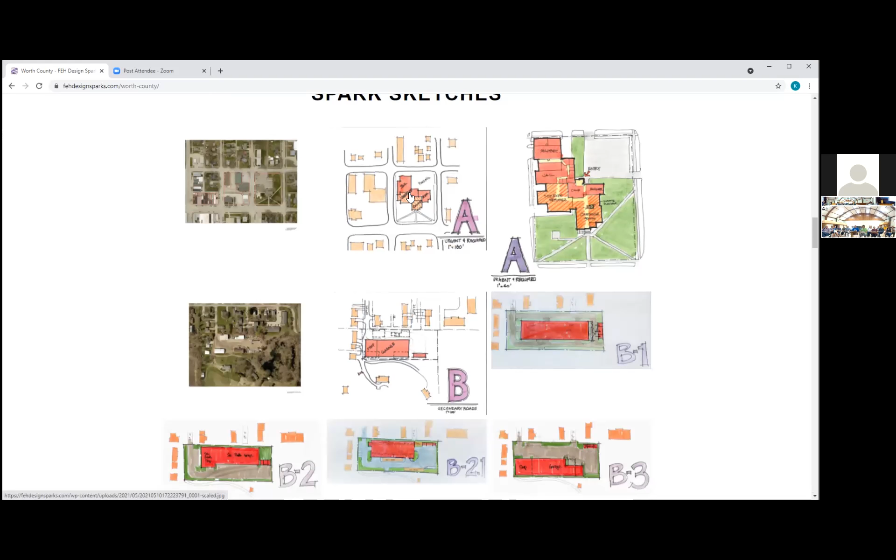Okay, for some of you who weren't able to participate in the Spark Work session the day before, ATF meeting number 3 and number 4, we will go through these and kind of explain where they're at. So we asked you as a group, what do you want us to study? And we made a long list of things you wanted us to study, about 9 things. Well, during those meetings, more and more things we were asked to study. So we started at a very small scale.

You can see 1 inch equals 100. These are just very diagrammatic sketches. This happens to be the first one, A, and the idea was, well, only do what's required and what's urgent on your assessment list. The buildings that are in orange are existing buildings. So this is the existing 3-level courthouse and the 1-level sheriff and jail space. We got red lines through it because that means we need to renovate it because there's so much work inside that is not compliant with the law or the code or the state requirements. Space needs is a big part of that, and this concept would show how big we'd have to expand the jail, for example.

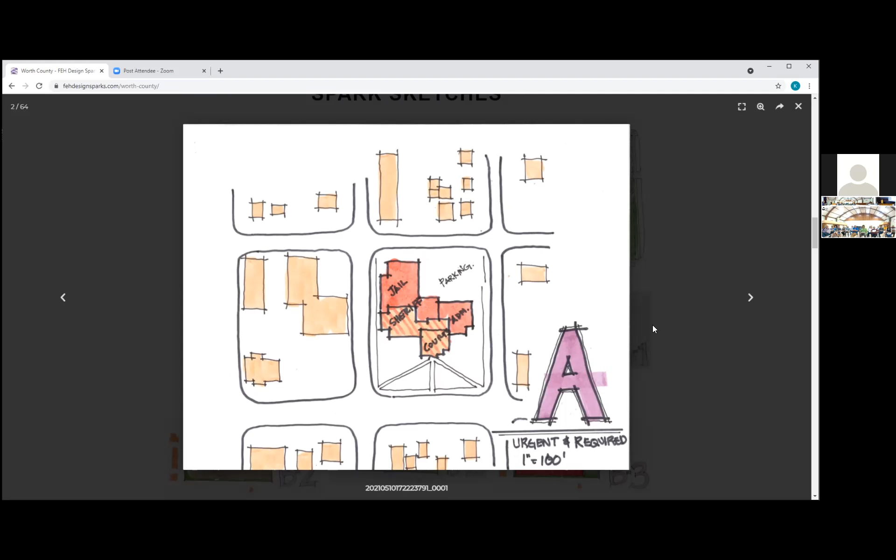So when we looked at it at a little bit larger scale, 1 inch equals 40, you get a better sense of, okay, how much square footage do we need? The yellow that you see, that's just really circulation corridors. The red boxes, that's all new construction. So this shows what is required on the sheriff and jail side to both meet the state requirements for space and to bring the deputy spaces back out of the storefront building that's a block and a half away and back into this building for better efficiency of staff. And the courthouse space, and a space for the engineer and maintenance. So as you can see, what's required and urgent only is still a pretty large expansion if it's going to be all at that space.

So this was done as a strategy to show you what's probably the most cost-effective strategy: to renovate the existing building and expand it. So that's option A.

Excuse me, as you go through, can you tell us what the expense is for these options? Like option A? The question was, as we go through, can we talk about the expense? So did everybody pick up a sheet like this? If everybody picked up this sheet, there's a lot of options here. You asked us to study a lot of things. So what we tried to do is simplify that for you into categories. So you see courthouse, administrative, and courts. So that means there's not a jail or sheriff there. It's the administrative departments and the courts. It's option G, J, and O.

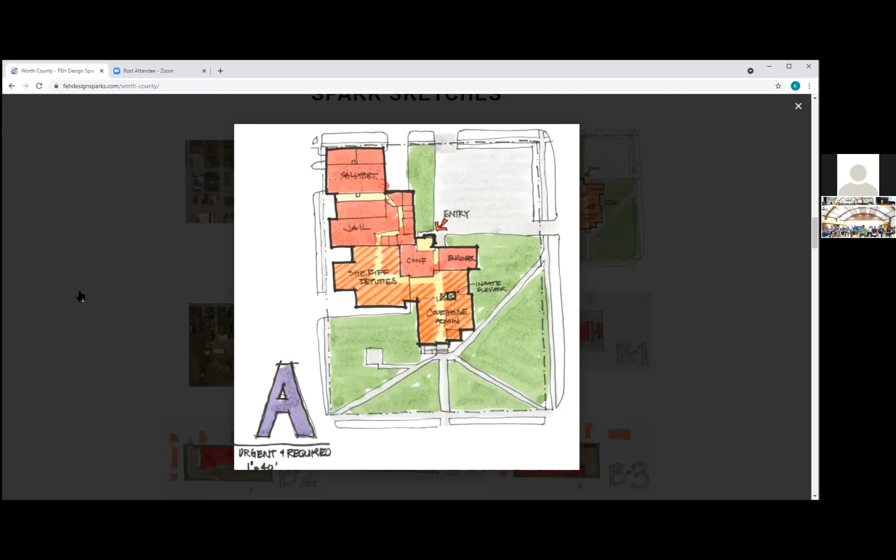Okay, so these are realistic budgets with healthy contingencies built in as well.

So Hey, Kevin, could I weigh in on that? Go right ahead. So the Beacon site is a representation of the legal, it is not the legal. Correct, it says that on the Beacon page. Yep, and then I have been to the assessor's office and they haven't done updates in years.

That I'm aware of, as alleys have been vacated and bought up by people that haven't changed it, and that's up to that office to do. And then I draw the representation of that on the Beacon site. So just to let everybody know, when you do something like that, we don't go by the lines on Beacon or anything like that—it's just a representation of the legal, it's not the legal itself.

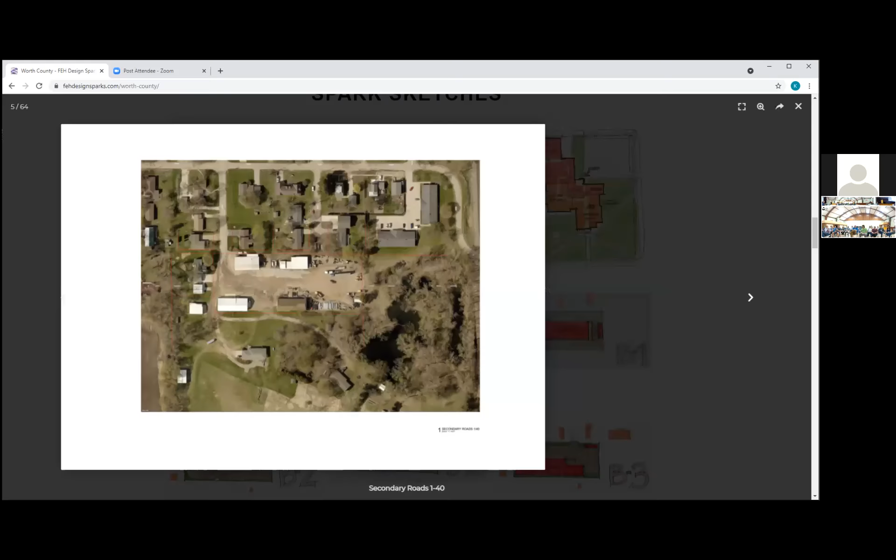Well, what got us was the pictures that Tom put further out. Yep, we're gonna be looking at those, and again, these are very diagrammatic. This is basically showing a sense of scale, replacing all those buildings that are all very, very old, with a structure to house all the things that you want this picture to house.

Alone it cuts off 13th Street. Yeah, yes it does—there's homes in behind there. And anything that is done on any of these sites certainly would not be done using Beacon as a base. There would be a site survey that identifies property boundaries, utilities, topography, easements, and so forth, before anything would go any further than this.

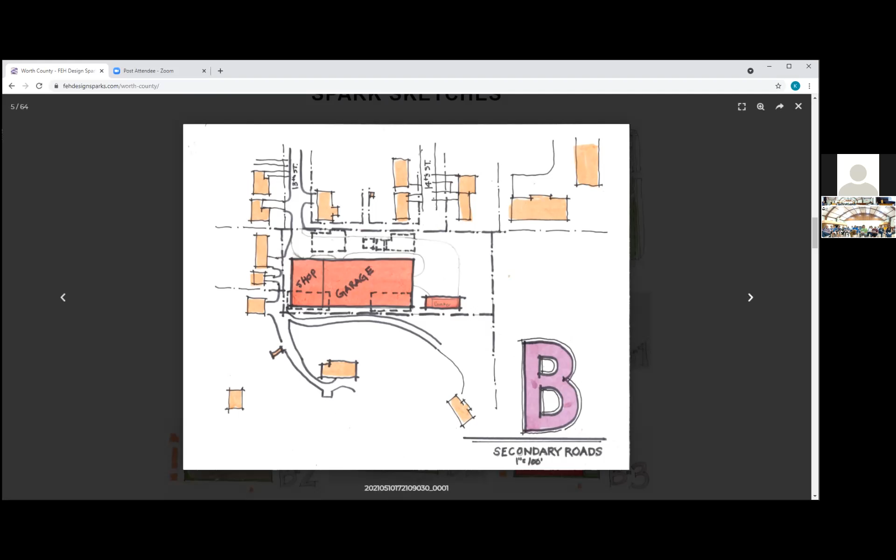And costs for those surveys and subsurface investigation is built into the budgets for every one of these. So this was a diagram for B at that high scale.

And we looked at lots of different scenarios for what that might look like. There's a lot of different ones, and when you look at this, you'll see, boy, they didn't do a cost for B.

We did not do a cost, but based on what is shown here, that's about a $6 million total project budget. And when we had, I think it was meeting number 2 or so, somebody asked, well, what's the cost of that? And we said that square footage might translate to about $2 million. It is way more than that.

And you can see the size of this structure. If it were to be built at this size, which it may or may not be, and it may be done in pieces, that's what you're looking at for this kind of cost. And that price was developed for looking at this facility here on the site we're on, over there.

I have another question. Yeah. What type of building is it? Is it a metal building? Is it a concrete building? What are we looking at for this building? It was laid out as a...

Precast concrete slab building with the expectation that it would last 100 years. So it's precast concrete slab, insulated sandwich panels that are fabricated in Iowa, with basically a gable metal roof on it. That's what was priced here.

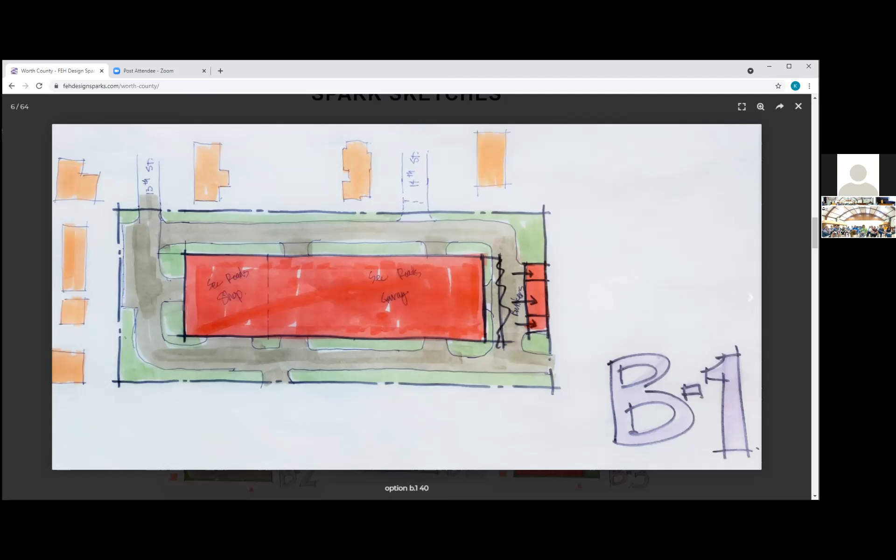This could have lots of different types of roofs. We've built many structures like this. What we put in this budget was a low-sloped gable roof with metal roof panels, just a long linear design—there's an image of it in here too. But it could have been a flat, low-slope roof with a membrane. Could be a lot of different things. Could be an arched roof with different materials. But we tried to use kind of a baseline for this structure.

So these are a lot of different layouts. This happens to show more of what the inside might look like, where all the different vehicles and pieces of equipment would be stored, the smaller staff areas, restrooms, the sign shop—the salt, sand, and mixed bunkers are outside. There's some yard storage outside, a wash bay, but basically all the individual pieces of equipment. And if we can keep most of that inside, you're going to get a lot longer use out of your equipment, your investments in equipment. You may not need to replace them as often.

I'm just curious—when you look at this particular picture, it shows that, again, it took away 13th Street and the continuation of our street. So are you going to go back and redo this, because it's hard to even consider any of these options when each one of them either infringes on our alley that we own, or totally cuts off 13th Street, and now Linda and Arnold Griffith can't even get into the driveway. This picture shows that Arnold and Linda Griffith can't get in and out of their house, garage, or shed.

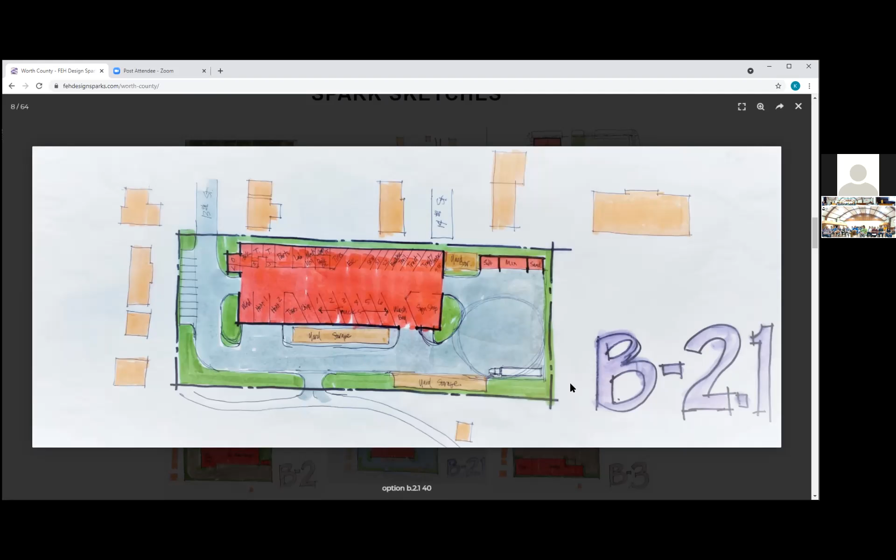The homes and developments on the north end of town can't grow because they can't hook into the sewer system.

So the next thing we were asked to look at was county conservation. County conservation right now inhabits two small buildings that are basically filling that little lot. It's not ADA compliant, and it has to be. The entrance, the restroom, it doesn't have any of the things it needs. Plus it's short on space. If you've been in there, you'll know.

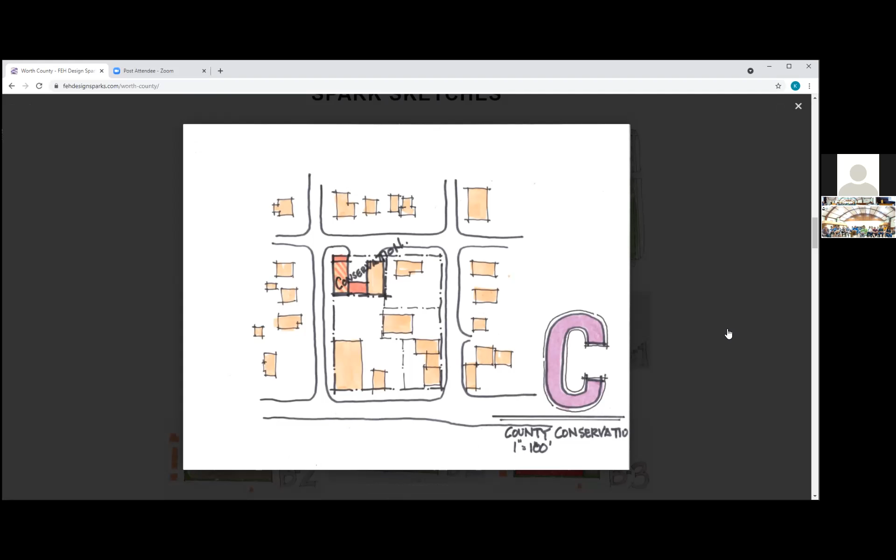So we tried to look at what it would take to add some space and make the building handicap accessible. That's what this diagram represents. We did not price this out because honestly, we don't think this is a feasible solution, and nobody who participated in any of the meetings ever voted for this or said they'd like to study it further.

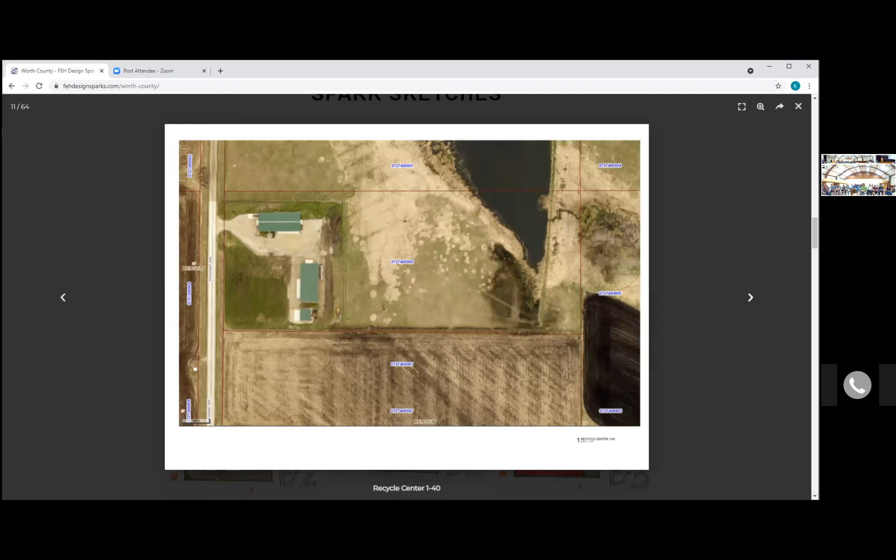Here's that recycling site that some of you are in love with as opportunities for where buildings might go. The thing I think is important to recognize is that the county doesn't control this whole site. The state actually controls this whole section, so the county only has control of this piece. But of course, as designers responding to other folks' ideas, that never stops us. So we showed some drawings of structures that might sit on the state-directed piece.

Option D, this is county conservation D, with a new building to replace the structures that you have. You'd probably sell off that piece to somebody else in town, so that's D. And we did price this out—D and D1—that's about $2.1 million, as you see on the sheet. And of course, this is a diagram.

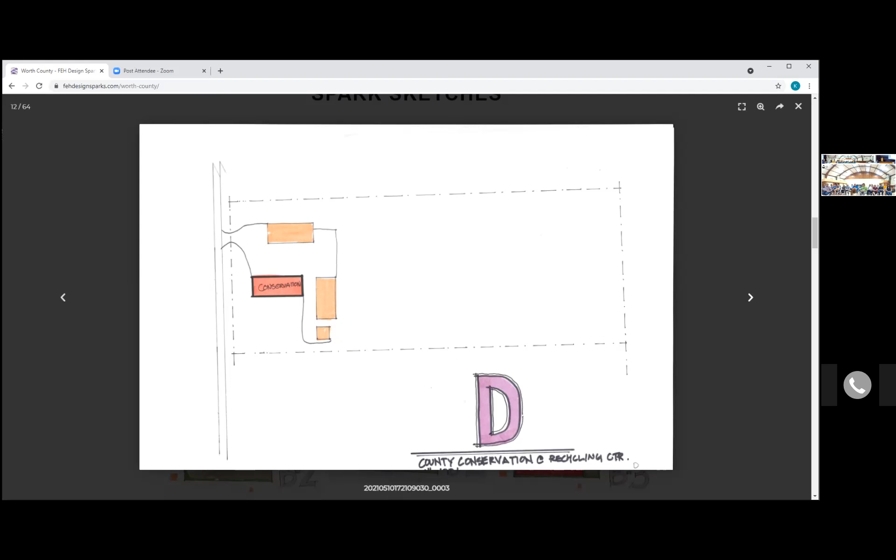My name's Corey Blue, I'm the current mayor. Seven years ago, I believe, county conservation came to all the city councils presenting that they wanted to build a structure out at the recycle center, and I believe the project was only $1 million at that time. It was put to vote by the county, and nobody wanted the property taxes to go up, so it failed. And it was a cheap project. So people do not think future.

Yeah, just wanted to point that out. Yep.

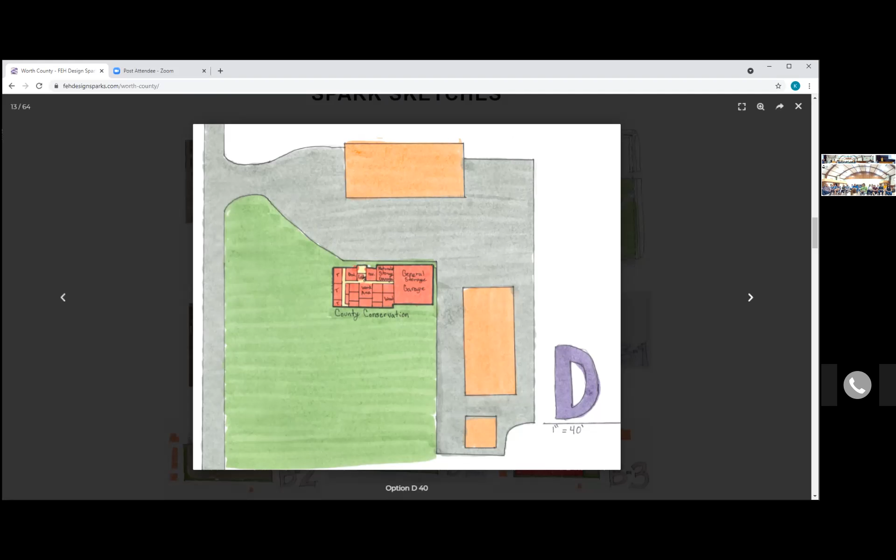So this is that same option with a little more detail drawn. What is the type of building?

The question was, what building type did you look at for this? This one is priced as a 6-inch metal stud with insulation and continuous insulation to meet the energy codes, with a sloped asphalt roof. It's not a large building in scale—certainly not as large as the one we were just looking at, or the courthouse, or any of those other departments. So this is a fairly standard, basic building.

With a brick veneer on the outside. I understand that conservation already has a building out there—can that be made use of? Conservation has a shed out here, I believe it's this structure here.

We have a conservation—yeah, there he is. It's being used right now. That's where all of the equipment is stored. Well, I mean, can it be used—that kind of, we were talking about putting that equipment into this new building that you were putting up.

The new building is not really replacing this one—it's replacing the two, it's replacing what's in town. But when you talk about using that with the road construction, the road maintenance people, we did have another option. Somebody asked, what if we move county conservation in with the roads structure? So we do have another option that looks at that.

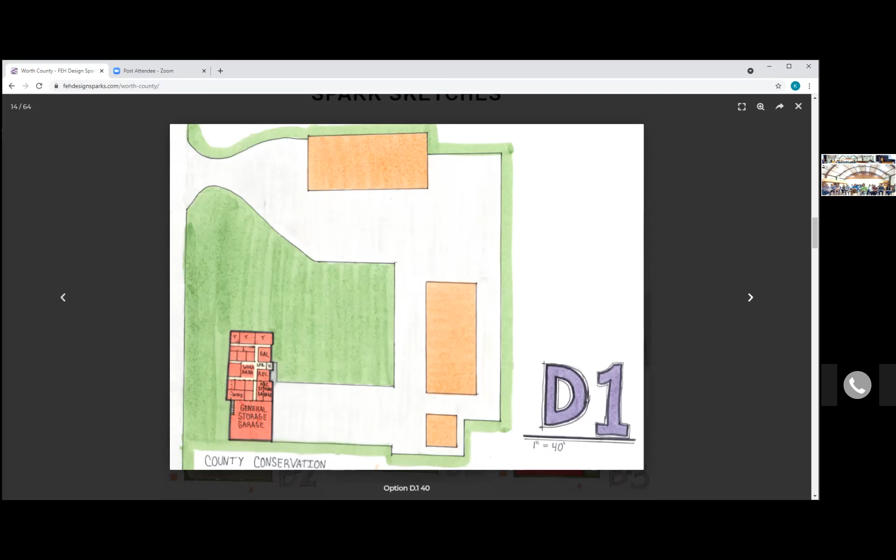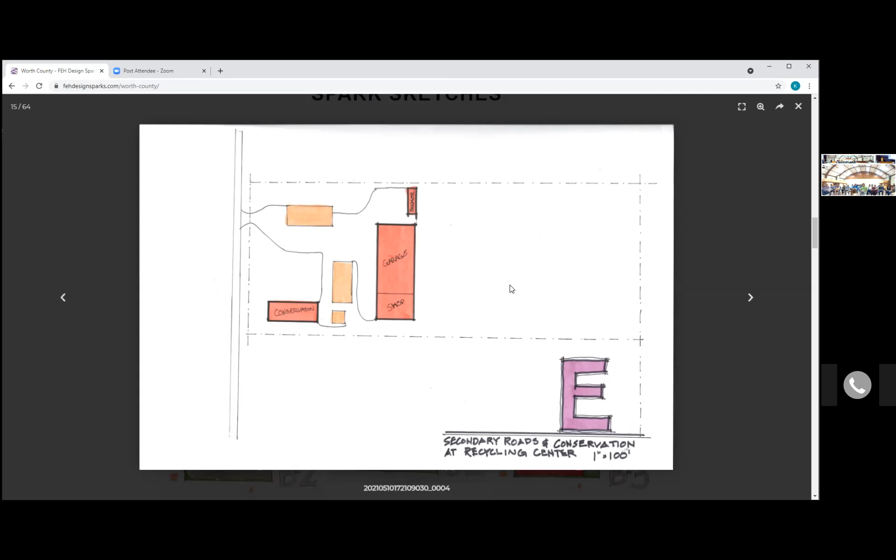And as I said, this one looked at actually moving county roads over here as well on this site. Where the footprint of county roads is, it is on the state property, not the county property. Does that mean you can't get it? Maybe, maybe not, it's a possibility. But that was another concept somebody asked us to look at.

So this is another site diagram of that same thing. Here are those three existing structures.

There is a septic field out here on the east side of the recycling building. So obviously there would be one for the conservation building as well and secondary roads, because we're not connected to a sewer out there.

But this is the size of that secondary road structure, what it might look like on the site. This is the fence. That's the fence, in case I missed it earlier.

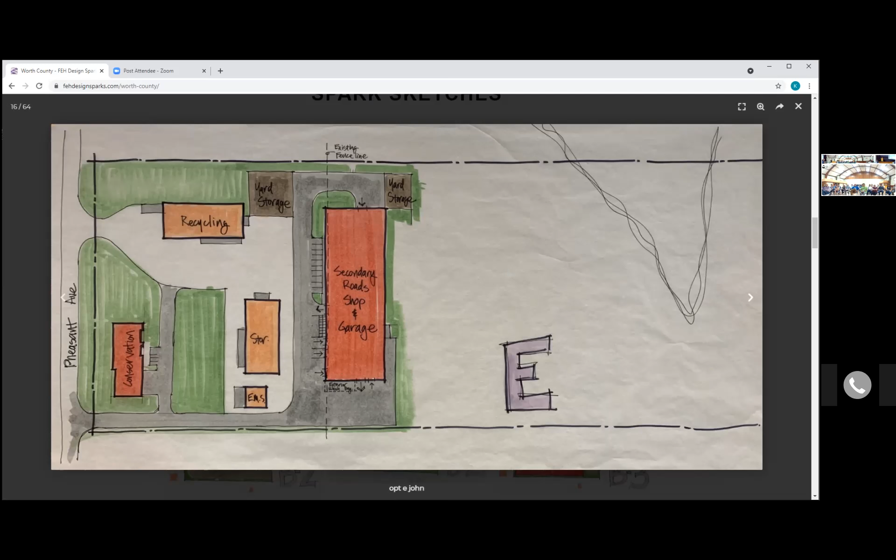So this is basically a larger scale layout of what's inside that structure. As you can see, there are a few overhead doors coming in, but primarily it's a drive-through facility. So you pull your vehicles in and then you can drive out on the other end, or come out through this right here or a wash bay here. And these are the maintenance hoist and parts rooms, and so on.

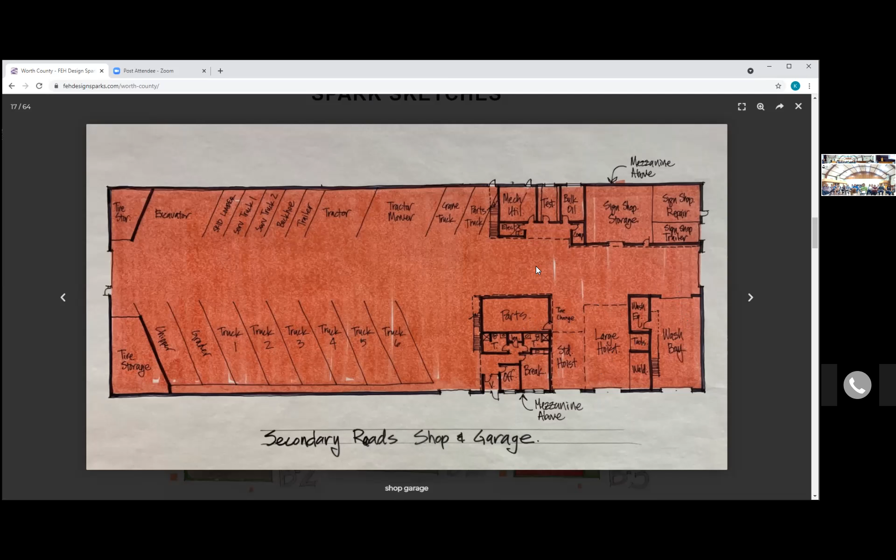There's what it might look like on the outside. This was just the idea that kind of went along with that big structure, with that sloped roof, precast concrete walls.

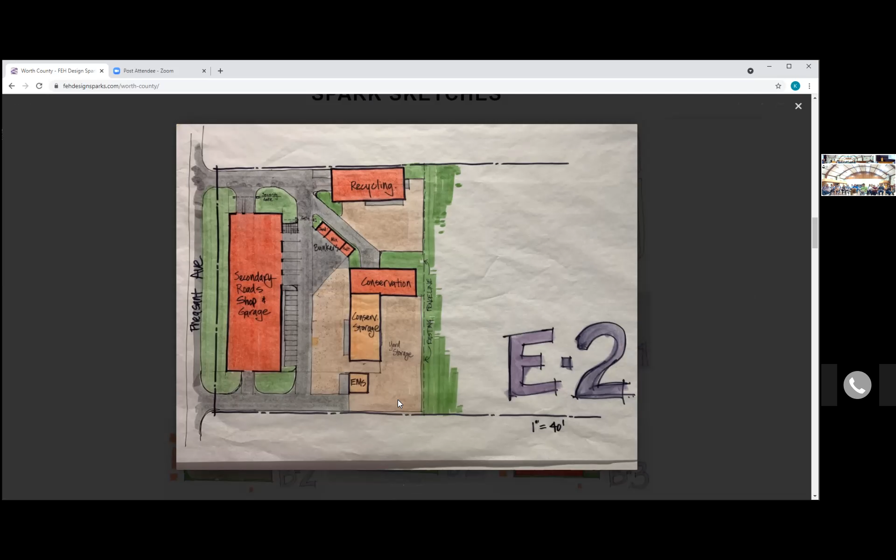Same drawing, basically, slightly different configuration. This one came as kind of a culmination from a lot of comments. Can we get it all on the county's property? And we said, boy, if you moved the recycling building, which is a pole barn, if you basically cut it off at the ground, formed a new foundation and moved it onto that foundation, and actually built the county conservation structure over here so it's connected to the other county conservation storage building, you could get secondary roads in here with plenty of turning radius for the large trucks and vehicles and all the parking that you need and not have to cross the line. So this was created at the end of the 2 days, and I think a lot of people really liked this option. E2 got about 15 points worth of voting. So it was one that people really liked, or preferred, I would say, at least the participants.

So this is another kind of layout drawing of what that might look like inside, the big one.

Okay, I have a question. So you're looking at spending $2 million more to put the big building on the west, move the recycling center, because it's harder than talking to the state of Iowa and trying to procure a few extra feet of ground. I mean, ground at $10,000 an acre, whatever. Would anyone from the county like to speak to that? Because actually it's going to be a very long and expensive process, is what we've been told. Well, that's what I'm asking.

Yeah, anybody in the county want to talk to that? Jim? What it is, the state actually owns the property. It was purchased with state and federal funds, and that has to be paid back at current market value. Okay, and then besides being paid back at the current market value to expand the existing site, then you have to fill in a potential wetland to do so. And that's a federal problem. No, we probably can't fill in the wetland is what I'm saying.

Yeah, well, I mean, that's what we need to know. Right, because it might be cheaper to spend the $2 million more is what you're saying. Right, because you've been to the site and you know how, once you go through the recycling center, how it goes straight down into the pond. Yep, and that's what essentially you'd just be encroaching on that pond. So it may be regulation that would keep us from doing it, not cost at all. Okay, well, but that is a question I have. Yep, okay, so.

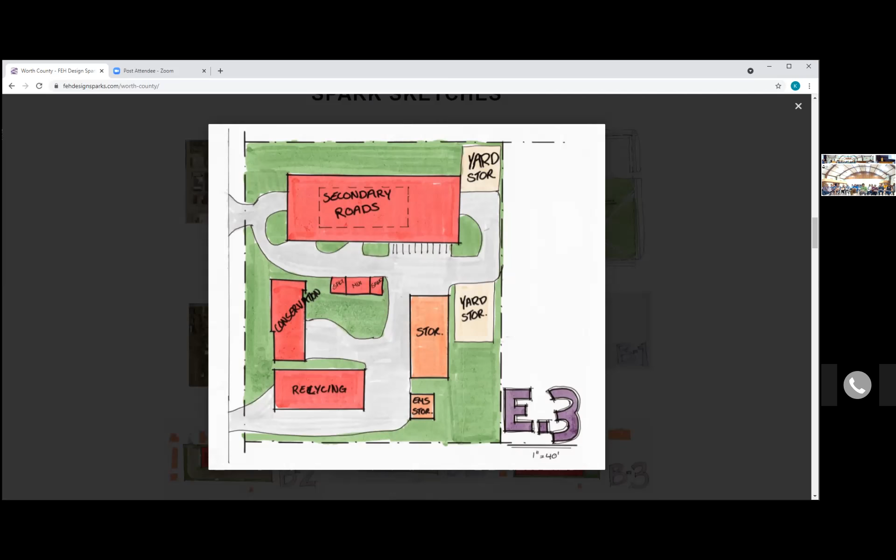F was that idea, what if conservation was also moved on the same site with the shop and the garage? What if that building was divided up so the roads shop was combined with conservation so there could be some efficiency in space, so you wouldn't have to double up on some spaces like restrooms, a conference room, or storage space?

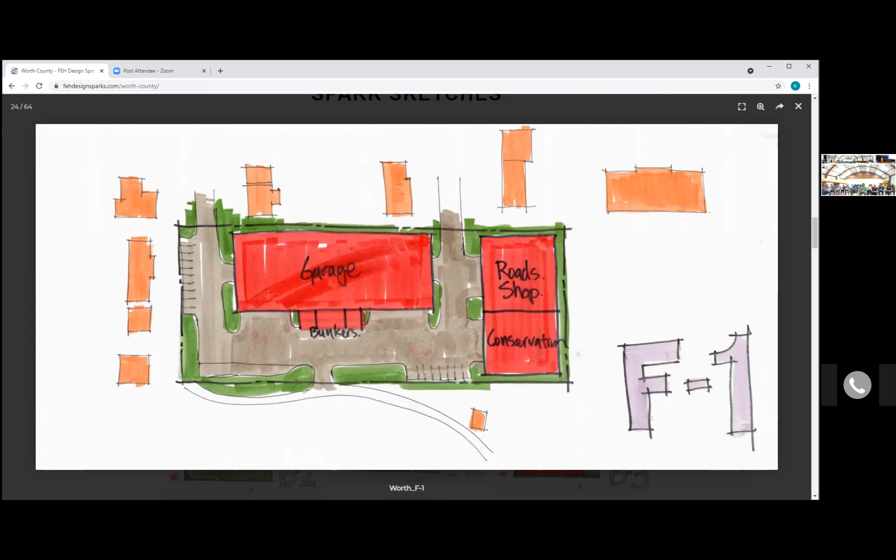Option G then was basically, let's renovate the courthouse. This is a concept that says let's renovate the courthouse, and as you see on this sheet, without having the jail and sheriff there. Jail and sheriff move somewhere else, and this is just the judicial space and all the departments, and bringing the treasurer out of the building they're on Main Street, so there's more efficiency into this building. You can also see that the maintenance garage and the engineering office stays right where it's at in this concept. That saves some dollars as well, obviously.

This red box is the footprint of square footage that you would need to add, and you'd have to renovate the existing jail and sheriff's department to give you the square footage that you need. And of course, you've got a lower level and an upper level on the historic courthouse section. And you get a sense of how that fills up the site as well.

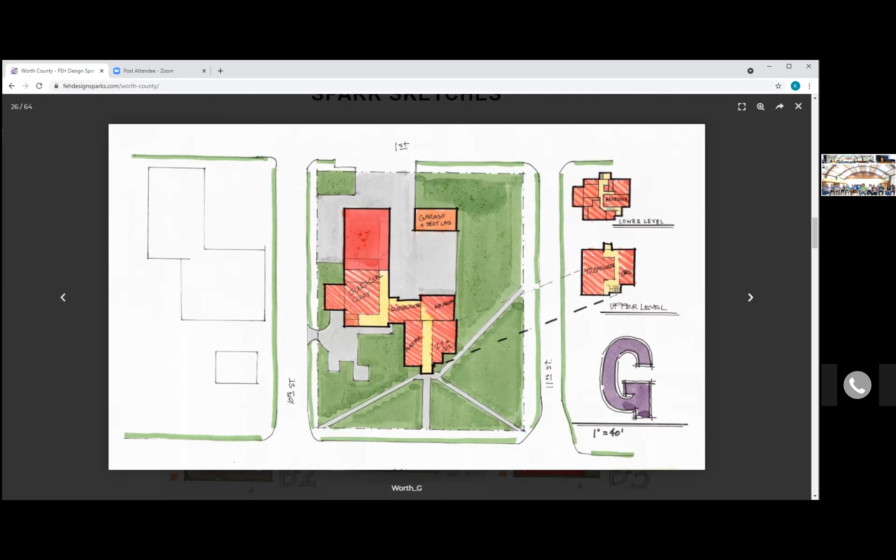H is, the idea is, what if we built a new sheriff and jail on the site as a new structure? Once that's complete, we move the deputies out of their building and the sheriff and jail into this new structure, and then we're able to renovate the existing sheriff and jail space and let the other courthouse departments expand into that. That's the idea that's represented in this diagram.

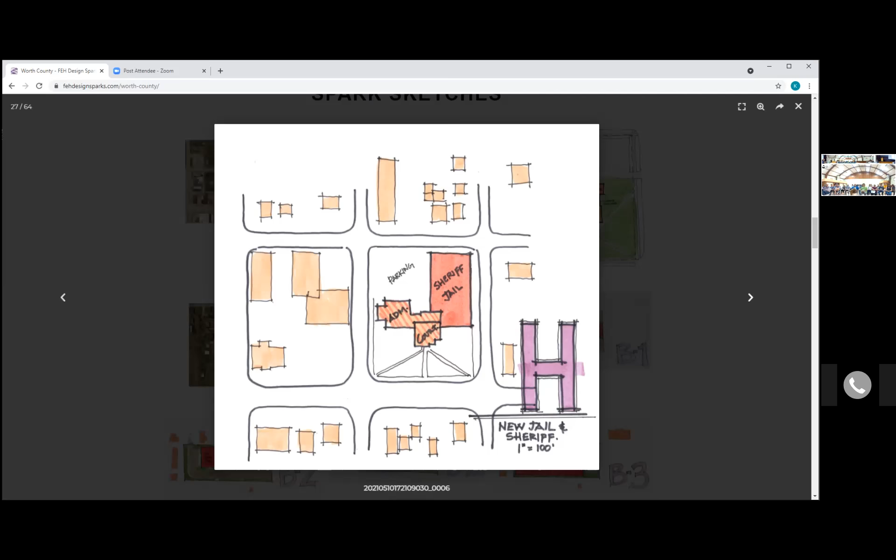What we found is there's still not enough square footage to be able to do that. We would need this much more square footage to meet all those requirements. This is the jail side and the sheriff's side up here. The historic courthouse structure is right here, and this orange is the jail and sheriff structure. This was a test fit of how we would fit the spaces into the building and into the upper level to create more of a kind of a public, more of a lobby space here.

Some of the concerns we heard about this was it doesn't meet the goal for success that was identified to provide separation of courts and jail from the public and other services. Because if you're bringing a defendant from the jail to the courts, you're bringing them right through the public lobby. Or you're putting them in a squad car and driving it around the block and bringing them into a sally port over on this side into the back side of the courts, which you can do, and it's been done in many places. So that is how that H fits, and you can see where H kind of lands on this chart as well. It's just under 14 million on a total project budget.

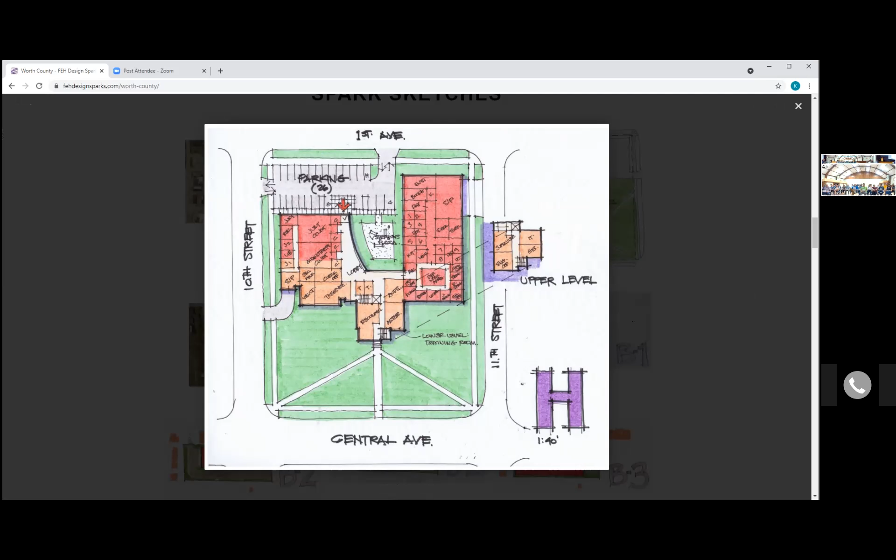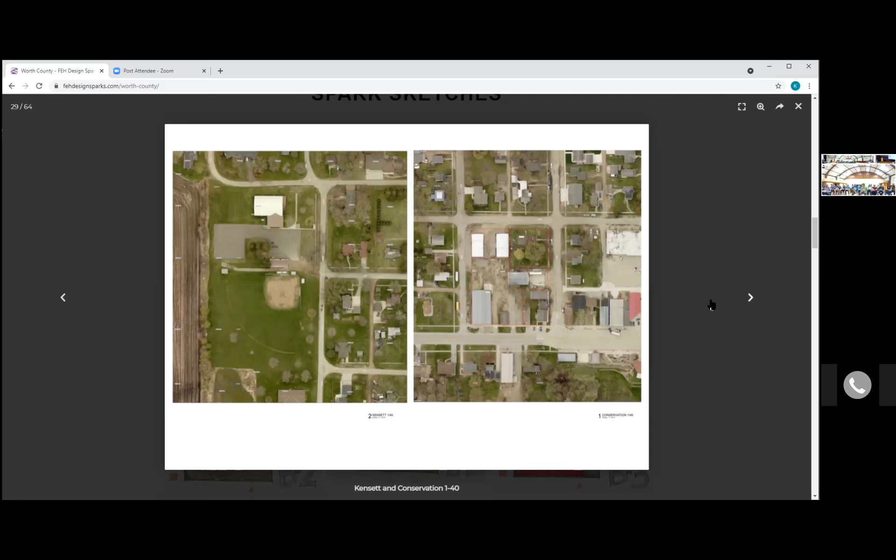So the idea was, what if the jail and the sheriff's department was over there? What would that look like? How would that fit on the site? What kind of impact would that have? So this is a diagram that shows the idea. This is more of a realistic layout of what the footprint would be if it were constructed here on a one-story structure.

So you can see the existing structures and how they relate to that. This is more of a layout inside the floor plan, and certainly it is not the perfect floor plan. It's a long way from that. But to make sure that the circulation works and the footprint works and matches the program of spaces that was identified.

Yes, sir? So go back to your first drawing where the sheriff's department is there. So you're hooked up to the parking lot. Are you planning on moving our city well?

This is drawn right on top of the city well, and after the gentleman drew this, I said, you realize this is sitting right on top of this building right here? Yep. So no, that would not be the intent. This is just a diagram to show how it might work. We would never put it on top of that unless we wanted to add a lot more money to the budget. Just wanted to point that out.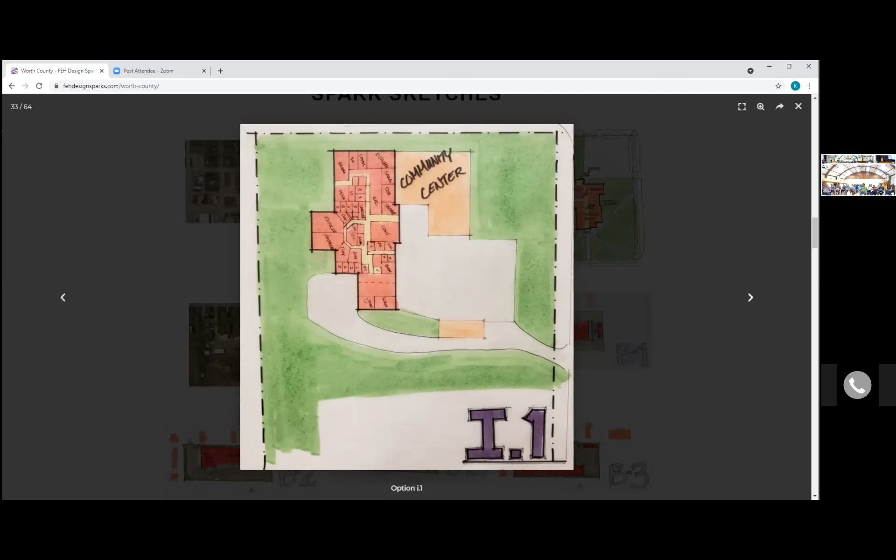It might provide some more opportunity depending on how the training room space inside the sheriff and jail is used, providing an additional meeting space and more flexibility for this building. So it really depends on how it's done, but that's what that one represents. This is a very conceptual diagram of what the massing might look like on the site, and it doesn't show the well either, but it is still there.

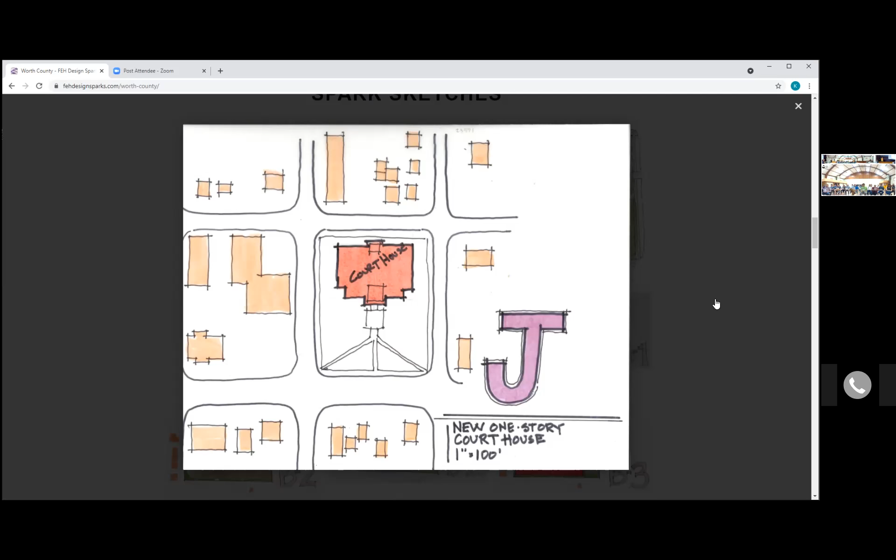Option J says, what if we took down the courthouse and just built a new courthouse on the courthouse square? This is a courthouse without the jail.

It has the courts, the courtrooms, and all the departments. There's a dashed line on the lot showing where the existing structures are. One benefit is you could build this whole structure, then once it's done, move everybody in and remove the older structures. So that's the idea there, and you get a sense of the massing and scale of that.

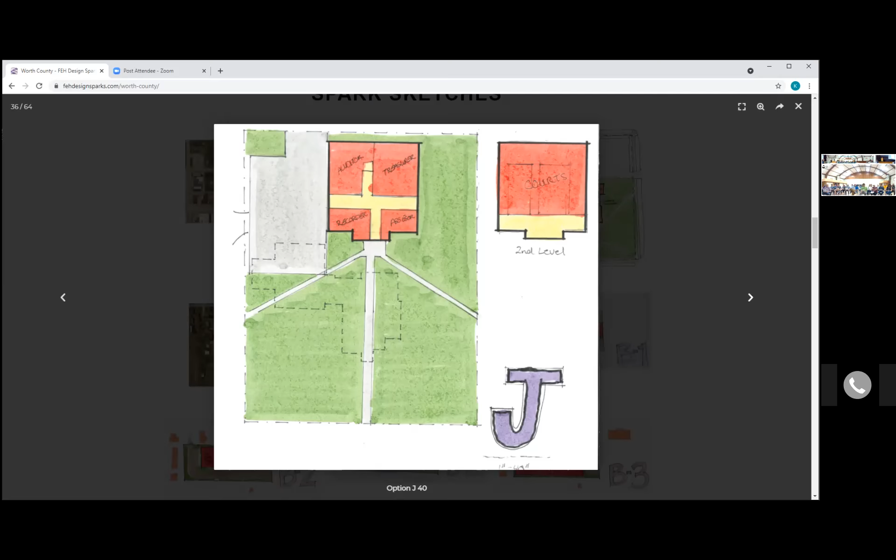These are interior layouts of what those spaces might look like, with the courtrooms up above and all the other spaces down below.

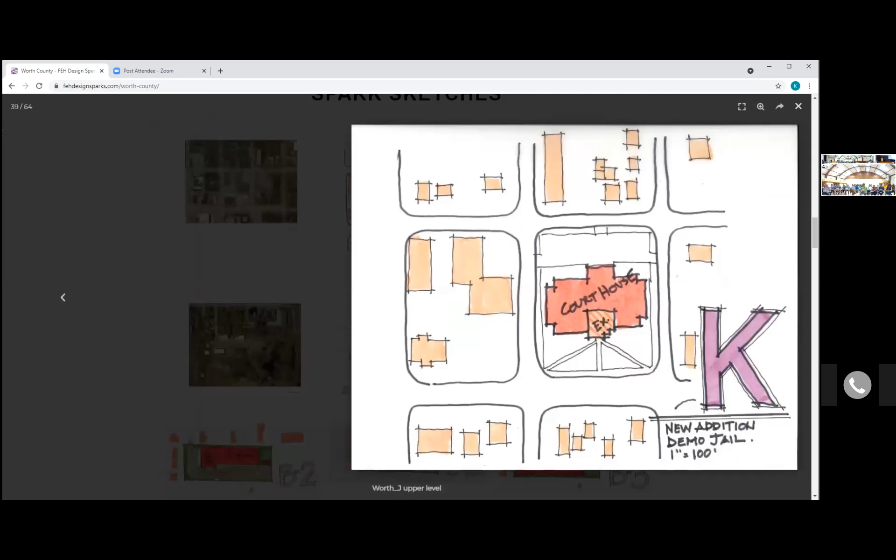Option K studied, well, what if we keep the courthouse and just wrap around it? There are also versions that keep the courthouse and the jail piece and wrap around it. So this one shows the 2-story or 3-level courthouse structure and the 1-story structures connected.

Expanding the jail at the same location, providing a new judicial wing. This whole box here is judicial, and then auditor, treasurer, assessor, recorder, and a central lobby space with a service area giving access to all those departments. Upstairs are supervisors, engineering, IT, and GIS.

Downstairs is really storage, some of the remote storage opportunity would be down there. So this is option K.

Again, you can see it does not leave a lot of room for a parking lot on the site. You've got about 25 spaces there. So what we showed was, what if you just put angled spaces right off the street as one idea? You get just as many spaces, and it's really not too far from the door.

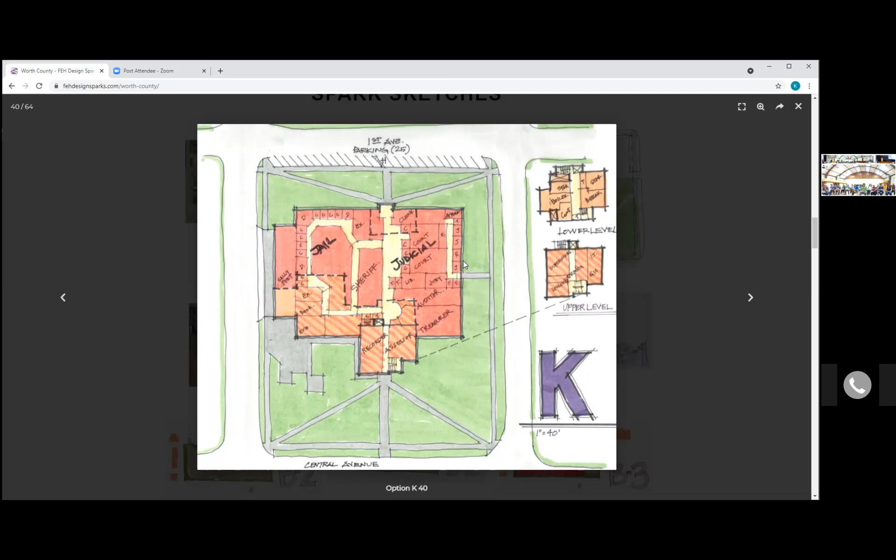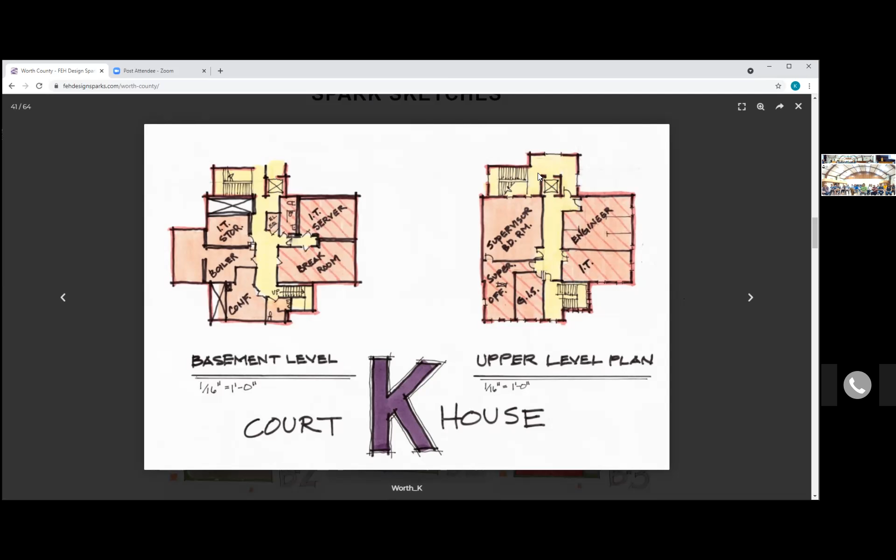These are more detailed layouts of the upper level and basement level of the existing courthouse. You would have to add a stair to the building to connect all those levels. You already have an elevator, but this would be a new stair added to make that part of the building more serviceable, well, code compliant.

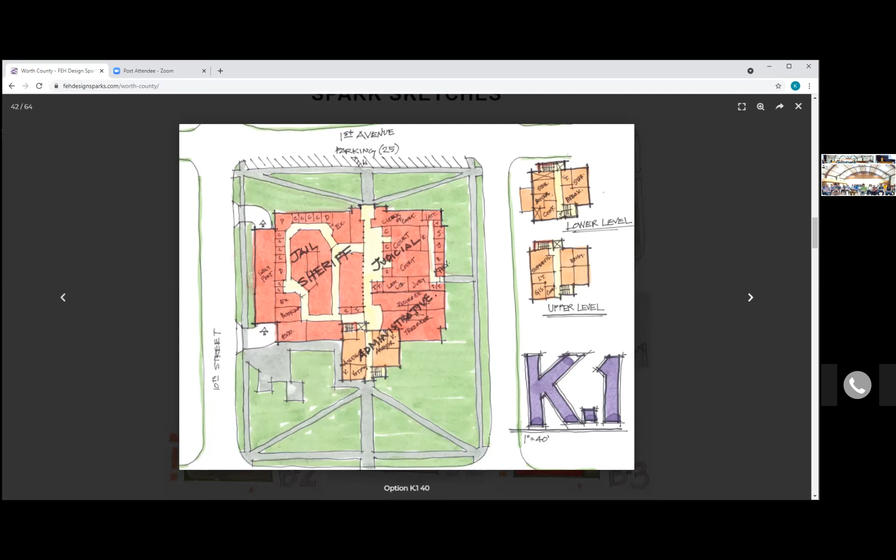Here's another one that's similar, but it flips some of the spaces around so you could build the whole jail piece, move out of it, and build the judicial piece separately too. This is K1 Prime, with a more central lobby and a dramatic entrance on the west side of the building leading to the judicial lobby, and a central core for assessor, treasurer, auditor, and recorder. So it's just another version of that.

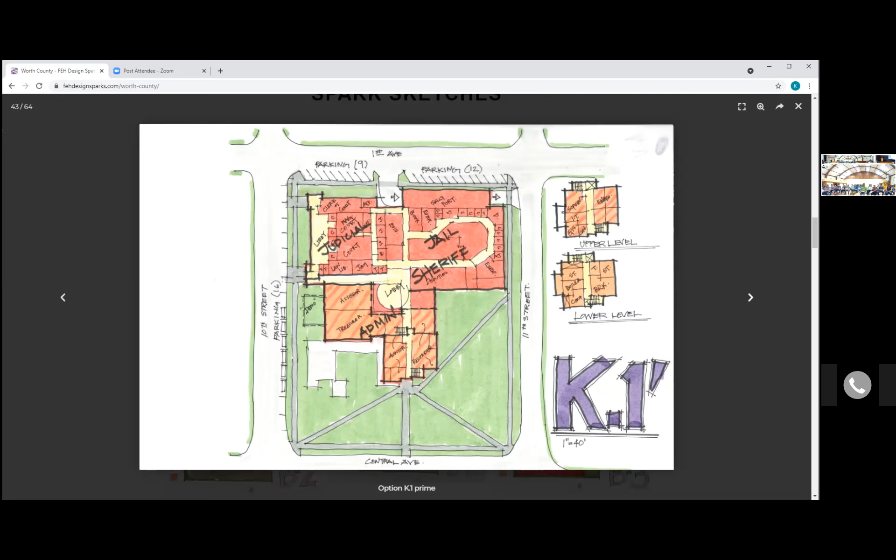That's a layout of what it would look like. This would be a pretty big building, mostly on one story. This gives you a real sense of the mass and scale of that structure. Right in the middle is your historic courthouse piece, and you can see the end of your existing sheriff and jail, plus all the other square footage that's needed.

That's K2. Option L is an L-shaped option to basically build all new on that block and take down all the structures there now, showing how it might lay out, and how you could build it by only tearing down the engineering building first, and once it's built, move into it.

Here's an L flip to the other side that merges in with the jail and takes down the historic courthouse structure. Here's the layout of what that would look like on the inside.

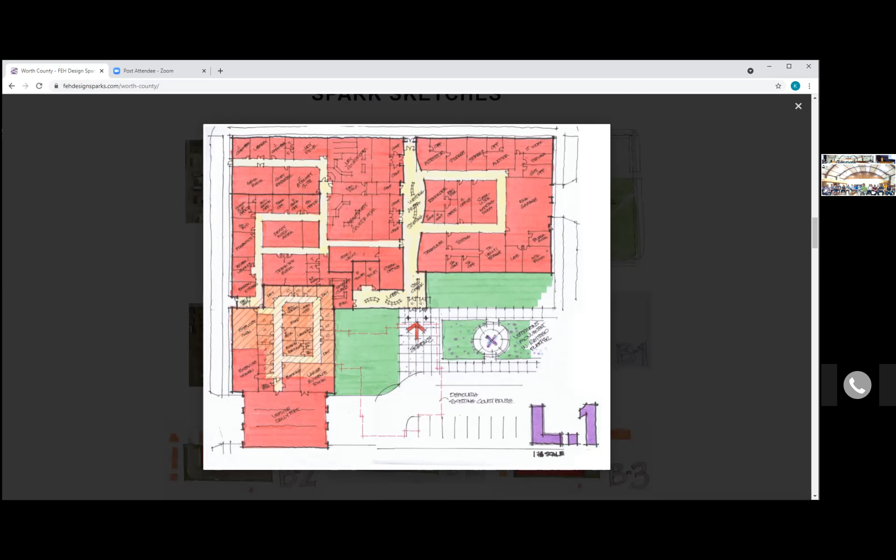In this one, they have to move everything out, rent space, and then move everything back in. Everything is built new, but you'd have to tear down engineering and the maintenance building in the corner of the lot, so you'd need to move out and find space for the engineering team and a place to store the lawnmowers and stuff.

I just wanted to know if the expenses of renting and moving were part of the budget. In the concepts that require space to be rented, we use $10 a square foot as a budgetary number to rent space for a period of time. That's not an unreasonable rental cost for office space in places where space is available. Those are built into the budget as well.

So the idea of a parking lot on Central Avenue, I think it looks terrible when you see it from Central Avenue. So for those that can't hear, this lady says she does not like the parking in the front green front yard of the courthouse square.

Okay, thank you. Anybody else? You showed on one of those that you'd added 25 parking spaces on the north side. Could you also add them on the east side or somewhere, to increase parking without building a big parking lot in the middle? Yeah, you can add them all the way around if you want. We jumped on the north side in that option because we ended up pushing an entrance up there, and there's more distance between the property line and the curb currently. That doesn't mean there can't be parking on the county property as opposed to just the street property, so you could put them on all sides if you wanted to. Personally that would be my preference, but this is your county and your facility, it's up to you.

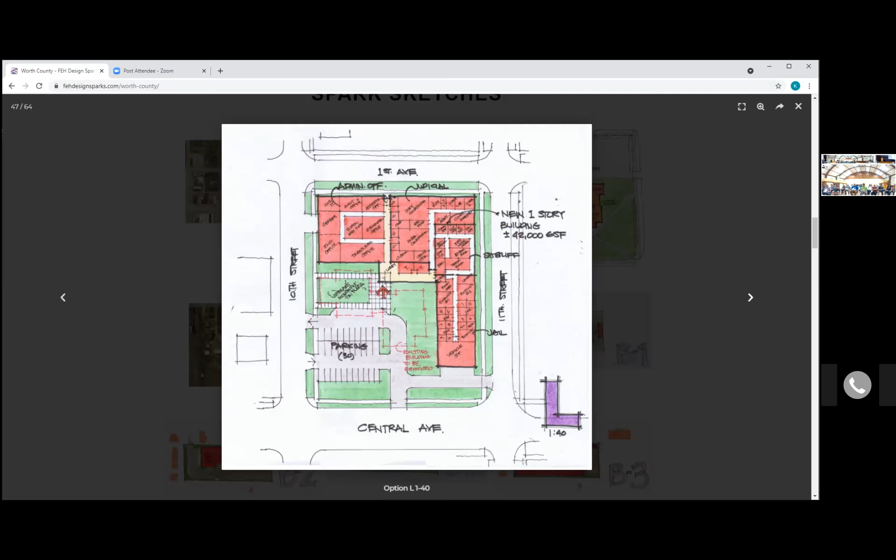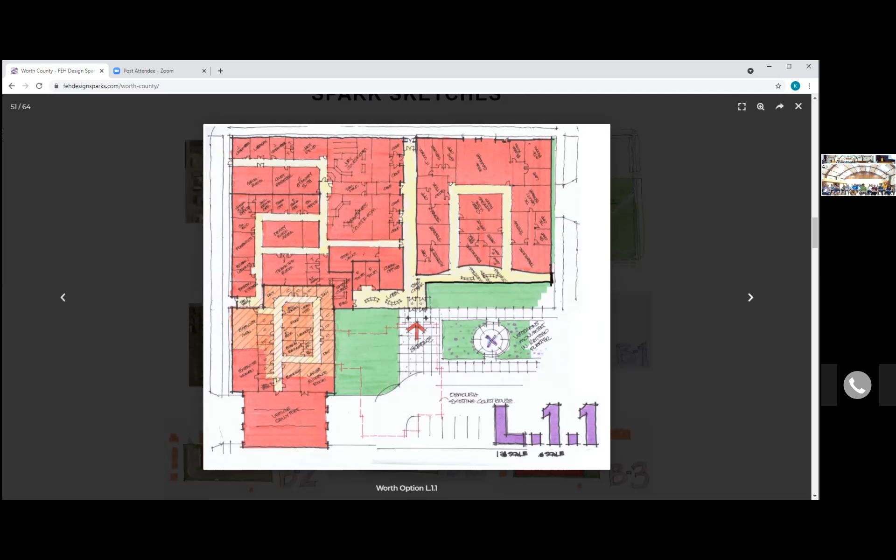So these are the other L scenarios. It could look like anything, it could have historic character with gables, dormers, towers, brick and stone, or it could be a more contemporary looking building if you wanted. This was a refinement on that L.1 that flipped the entrance into the court space so departments were separate from the court areas, giving more space in the lobby, say for calling a jury. This is a much more contemporary looking structure, showing what that might look like and how it fills the site.

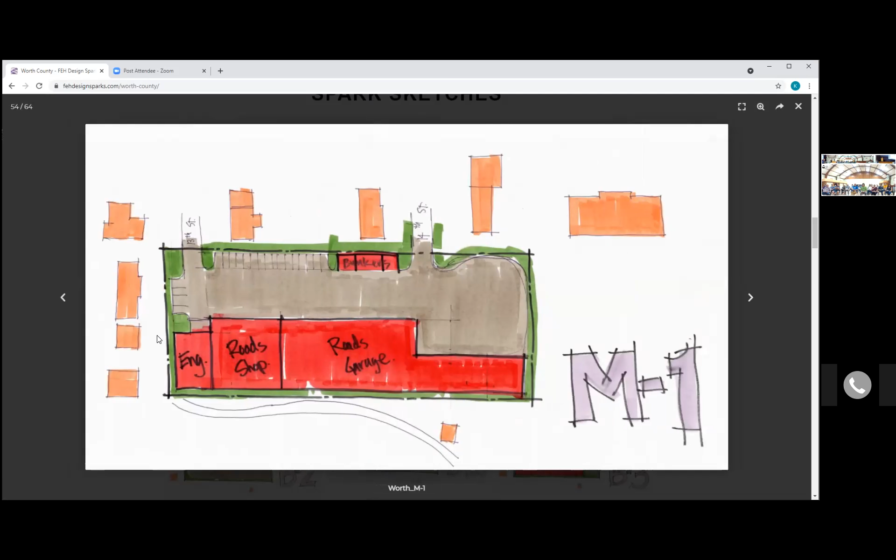Option M is, what if we did the structure for secondary roads but put engineering there and maintenance as well. The little box on the end marked ENG, that's the square footage of that piece, and you can see it's pretty small compared to the rest. Another different scenario of how it might fit, and then how it might work into the plan.

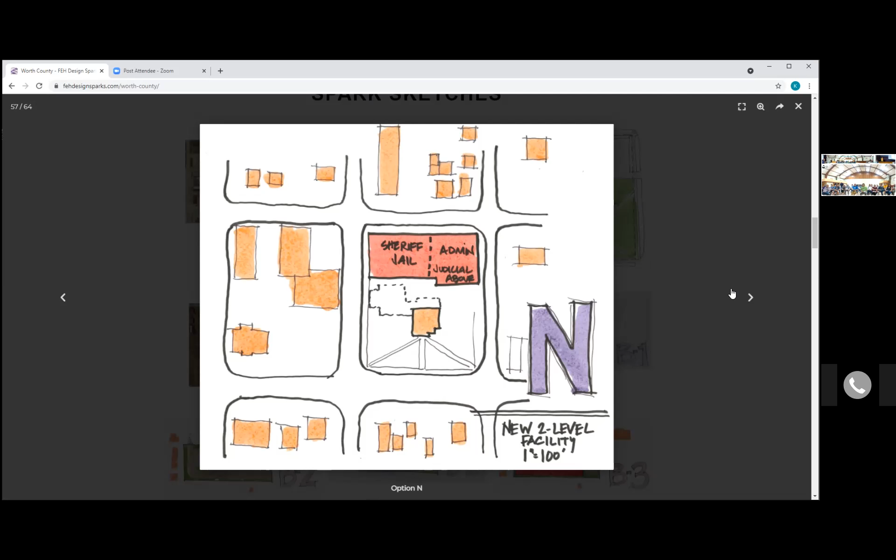Option N was studied by another consultant a few years back: building a whole new structure in the back and leaving the courthouse standalone up front, then tearing down the jail and the later additions. This option doesn't put anything in the courthouse, it kind of leaves it open, and builds all new for everything else. So you've got sheriff and jail, and all the county office departments, and all the court facility spaces up above on the second floor. That's pretty much what was diagrammed at that time.

I don't know how old that study is, but have the codes, especially for the sheriff, changed? Is that a viable option at all? That's why we wanted to study it. The question was about how old that is and what codes have changed. Is it viable? Yes, it is viable. It's possible you could do this, it's still up to code. It could be constructed to code, yes.

Okay, that's N. And that's how it might lay out inside. You can see the square footage in all those spaces.

So then after the workshop, we created O, P, and Q. This is option O. We added these to our Spark site so folks could see them in advance of today. This is a new kind of layout you hadn't seen before, but the idea is sheriff and jail is somewhere else - maybe it's in Kensett, who knows, maybe it's somewhere else, maybe there's another piece of property nobody pointed out to us, but somewhere not on the square. And it says, okay, if the jail and sheriff aren't here but the courts are, what do we need to add to this as a two-story piece? So we get a two-story cohesive structure that looks like the historic courthouse, but just more of it. And that's the footprint you would need for that.

It's got the maintenance and engineering spaces. It's got each of the departments. It still probably has some complexity on the bottom floor levels, because the historic courthouse is up half, several steps, so we'd have to figure that out. Do we elevate the entire site so it's handicap accessible, so the levels line up? There's a lot of ways to skin the cat on that - not the way you skin cats.

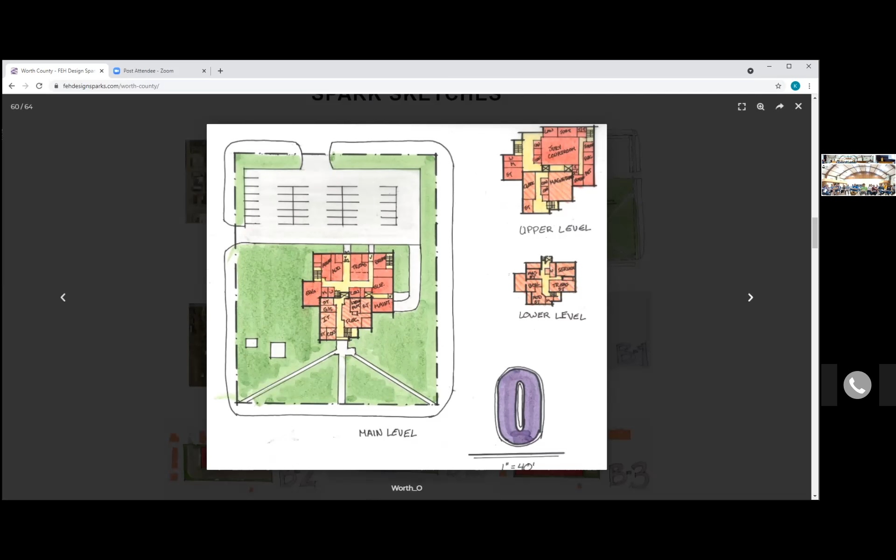Based on the comments we heard, we thought there'd probably be a lot of folks who would like that. Option P - we thought, well, somebody asked, would secondary roads fit here at Kensett? Well, by golly, we thought we better check that out. So we did this diagram, and it looks like, boy, it would. Again, this is just a test fit, but that structure could fit here. Don't know if you want it on the edge of town, maybe. But you wouldn't have to move the recycling building, and you could get secondary roads to fit there.

Any questions about that? Since this is a new one as well, it was something somebody asked, and there was like 4 people left in the room after the last meeting.

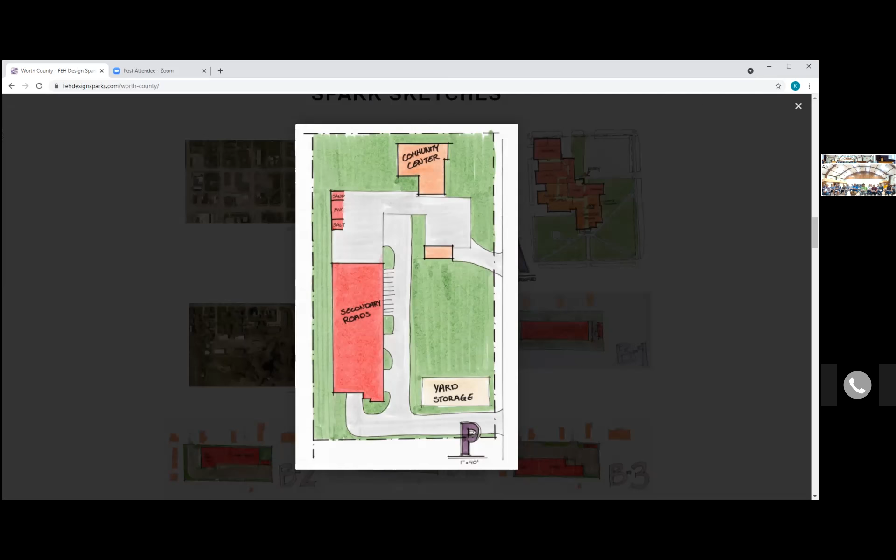Okay, and then Q. There's a question over there. Well, I was just gonna ask if the option was ever to put the sheriff out there at the recycling center. We did not diagram that, but - okay, I'm sorry - but it certainly would fit. We know what the price is to do it.

So generally, it's gonna be about that same cost as what it would be to construct it at this site, but we would have to add some more utility costs out there. Yeah, utilities that already are here in some fashion that we wouldn't have to replicate.

So this is option Q. This is again saying, what if we just kept the historic part of the courthouse and built the jail and everything on that lot, and reoriented things so the jail is kind of inside the core of the building, then the sheriff's department, and over here you have all the other departments, and the judicial is up above. So that's option Q.

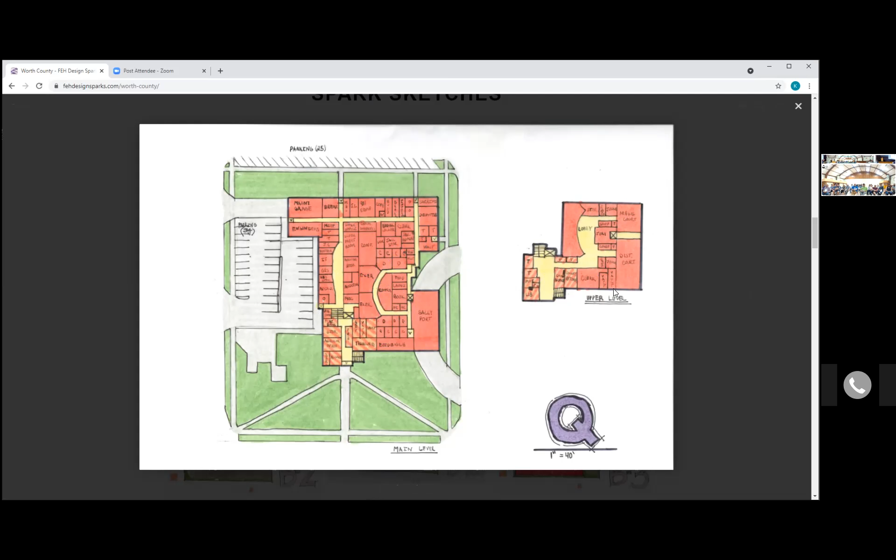And you can see the pricing on all those - they're not too far off from each other under that second category. So that's all the diagrams.

One of them was retain the historic courthouse, and that got a weighting factor with people voting in the room of 7.2 out of 10. And then the next one was, what's the effect on the downtown buildings? We want to preserve those. That got a weighting factor of 5.0 out of 10 as a level of importance that people who participated felt.

Safety and accessibility got a weighting factor of 9.4. Is it fundable and justifiable? Got a weighting factor of 10.0 - everybody said that's absolutely, support that, that's a 10. Can we accomplish it with the short-term funds that are available? That got a weighting factor of 6.7.

Can we accomplish it in the long term with funds that might be available long term? And that's like 20 years long term. That got a 2.8 weighting factor, because I think most people felt we don't know what the long-term funds might be.

So then the next thing we did, we put this chart together to try to organize all these different ideas. And what you see is, well, we've got the administrative office pieces, all those departments, GIS, IT, supervisors, treasurer, assessor, recorder, engineering, auditor. We're calling that administration.

And then you've got the judicial side, the courts, the county attorney, the judge space, the jury spaces, all those spaces. And there are some code requirements there that you're supposed to be meeting that you aren't.

And then we've got sheriff and jail combined as one unit. And obviously, there's a lot of square footage need there, and inefficiencies there with having the deputies located in another space. Then there's county roads.

County roads is a tough one because it's not just the county roads that are in Northwood. You have multiple sites where you have county roads. We're not really talking about consolidating all of them together in one place because there's probably efficiencies in having multiple locations. But just what we looked at for county roads and studying that. And then, of course, you've got county conservation. So those are the 6 different departments.